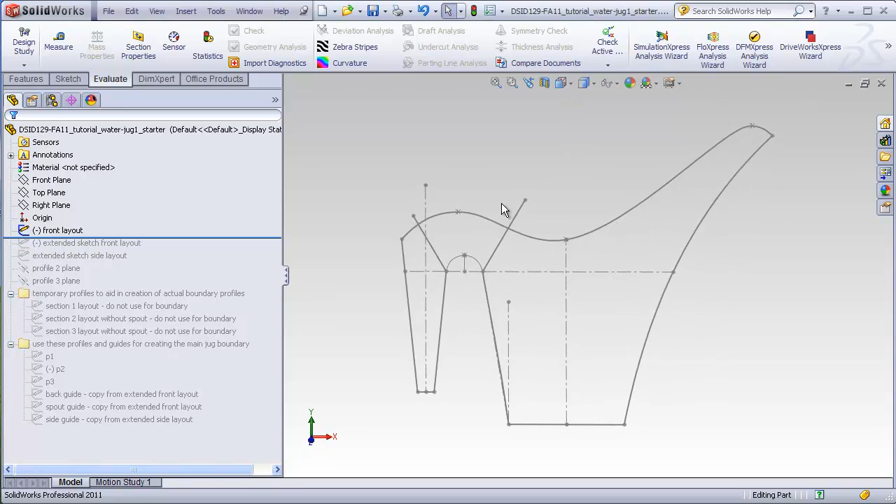That means that we need to have some guide curves that aren't going to end just here or end just here, but are going to have to go all the way up to some sort of plane in this area, and also have some profiles way up here that we can make our boundary up to, even though later on we're going to cut that material away. To do that, I've added a sketch on top of the original layout.

I'll edit this. What this sketch does is copies the original contours from the first layout and extends them as necessary to a common line, which will be defining where a top plane is for a top profile. So this line here is extended with an extra line here, and the extension on this line was short enough that I was able to just drag this line up to the top here. Similarly, I took this line of the handle and stretched it all the way up to this line as well.

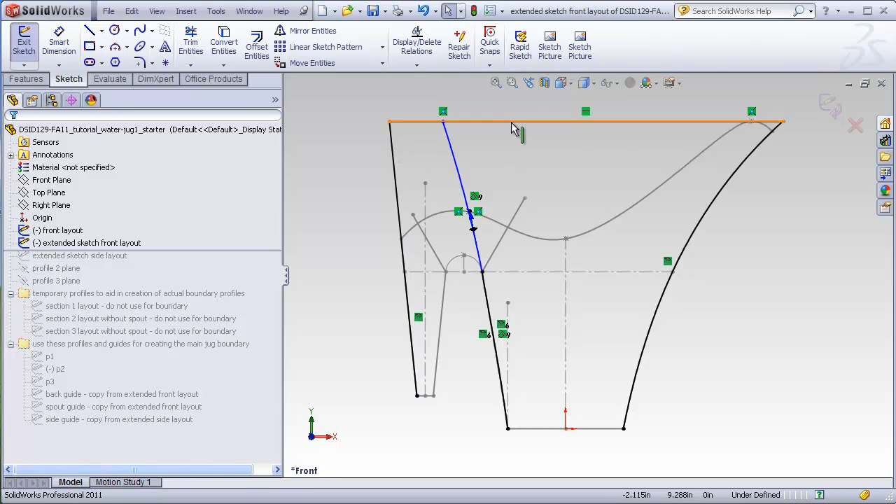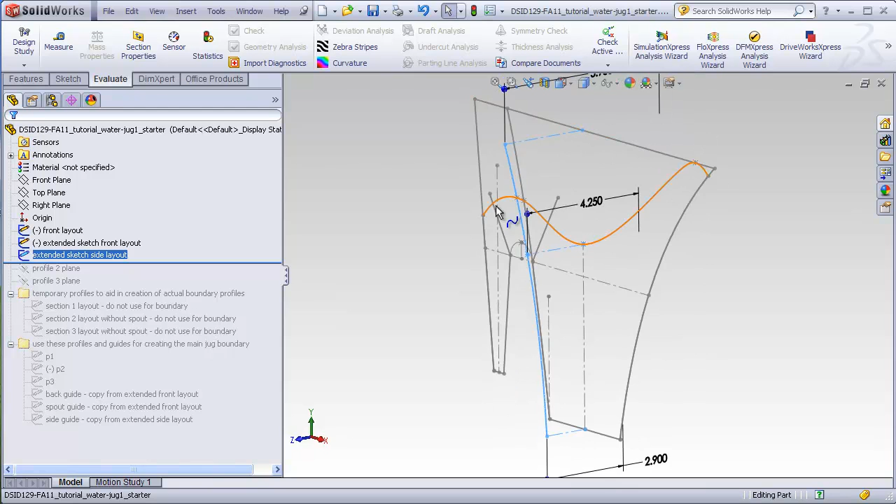On the right plane, for simplicity, I just went ahead and drew a single curve that goes all the way from the base of the water jug up to this top plane here that we have yet to establish. In reality, the jug in this area is going to end right at this point, but we need this curve to continue all the way up to this common top line because our boundary is going to go all the way up to this line before being cut back with this line. This will be a little more clear as we move along.

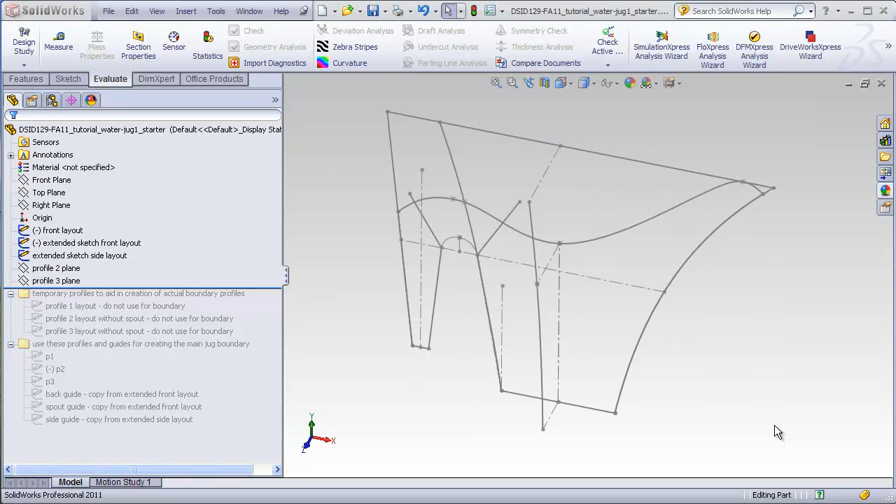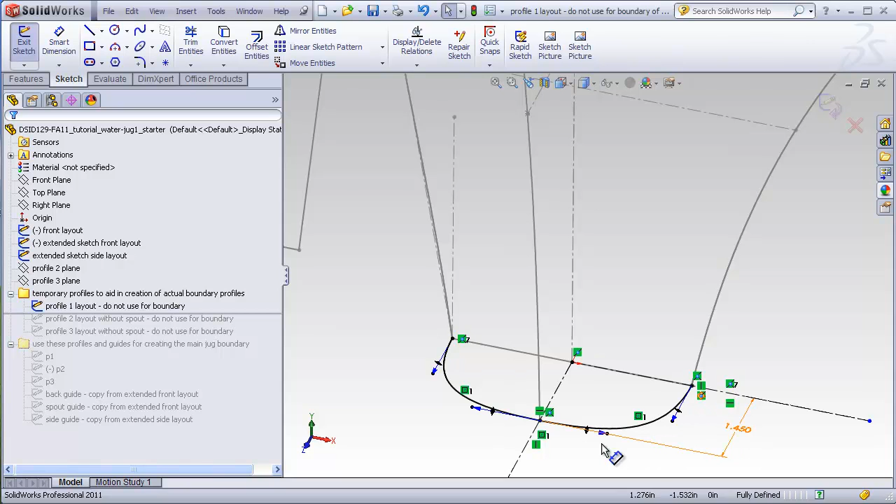So we added a profile plane passing through this line here, and another profile plane passing through this very topmost line that I've been talking about earlier. Now sometimes it's convenient to have temporary profiles that will not actually be used in the boundary. The first temporary profile represents the base of the jug. This was created by making a spline, mirroring it about this line to create this other side. So the base of the jug is symmetrical in all directions.

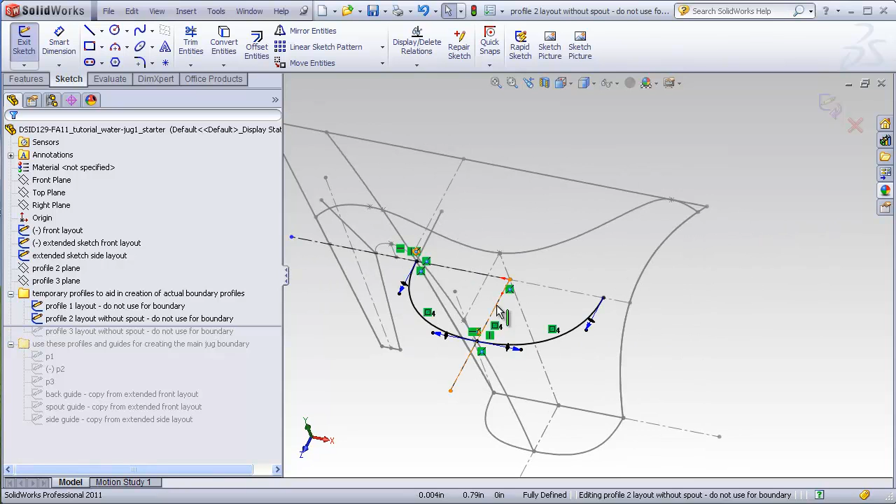The second profile represents what the jug would look like at this cross section if it did not have a spout blended into it. So again, we've drawn a spline going from this point to this point and is mirrored over to this side. The last represents what the jug would look like at this line or cross section, again if it did not have a spout blended into it. This is a spline, pierces this curve here, mirrored about this line here to create this second half here. What we're going to use these for are underlays to help us figure out what the total profile should look like when the spout is added into it.

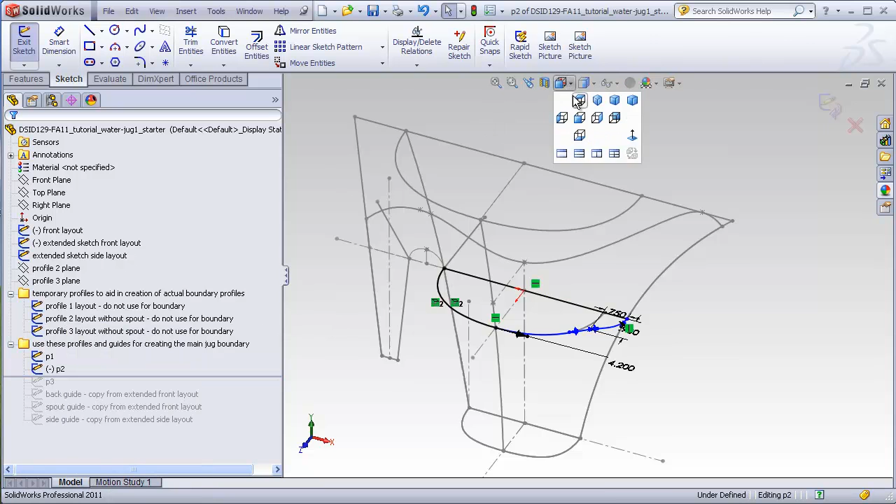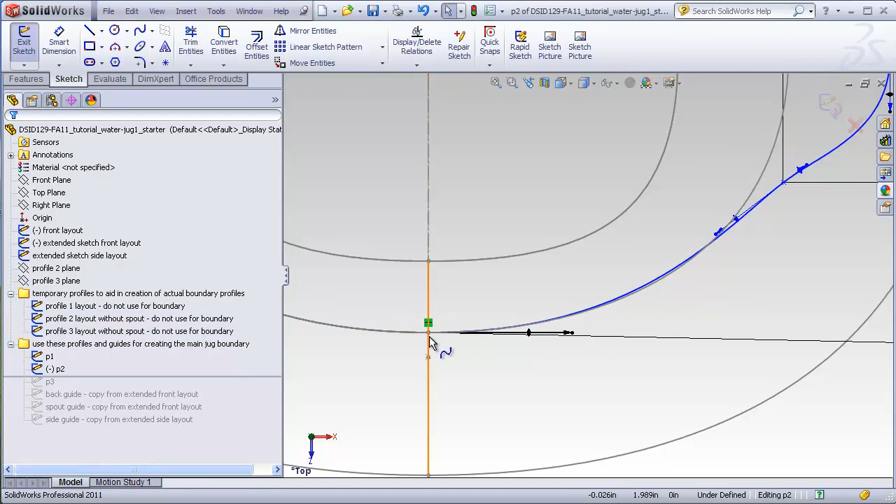First profile that will actually be used in the boundary will be P1. This one is just a simple copy of the profile 1 layout, so we won't look at that anymore. The second one is P2, which is a copy of the Profile 2 layout, which copies this line here, but then has a new line drawn in on this side, which has the spout area blended into it. And we can see the underlay of the original Profile 2 layout sketch, which is being used as sort of a visual guide just to get a sense for how to blend this spline in this area into the spout area. That way this jug will be reasonably symmetrical in this area until it gets to the spout.

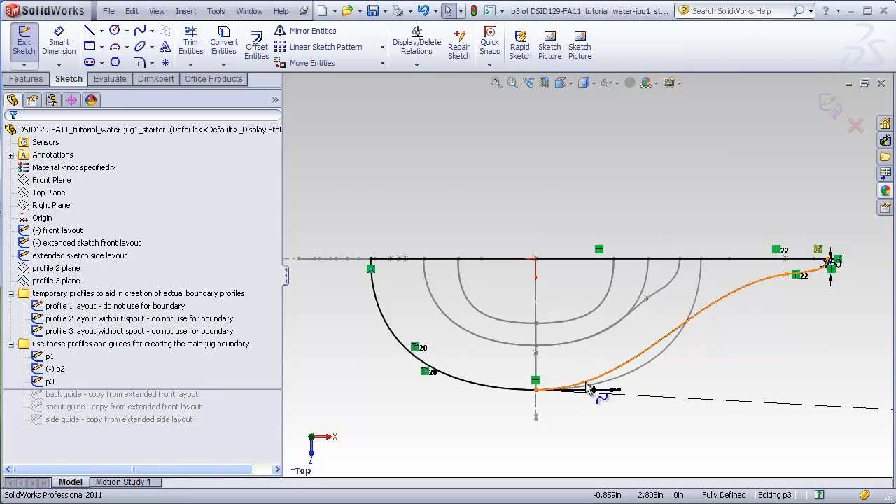Similarly for P3, the same idea is used, where this area here is copied from the Profile 3 sketch. This area here is a spline drawn in to include the spout, and this line here is just being used as an underlay to kind of help us guide what the shape of this should look like.

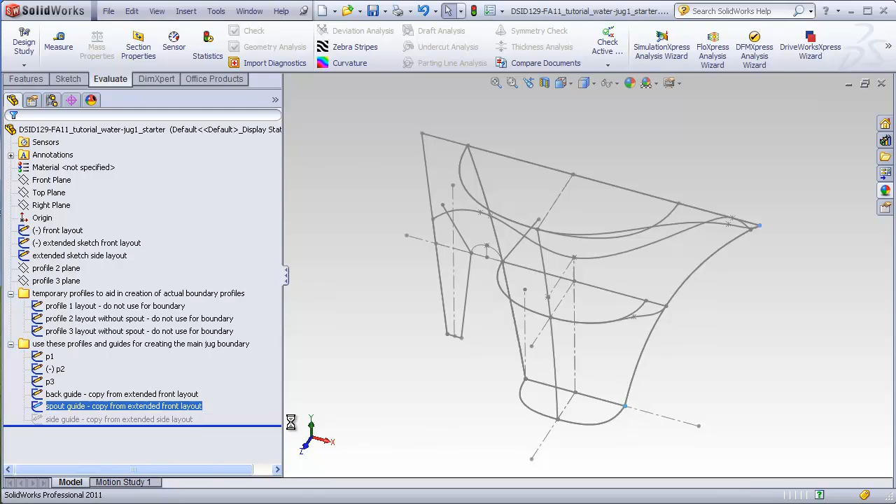Going to have a back guide for a boundary copied from the front layout, a spout guide copied from the front layout, and a side guide copied from the side layout, which is that extended sketch all the way from the bottom to the top. All of these guides go from bottom to top, even though that isn't necessarily how far the eventual jug will be going once it's been completed.

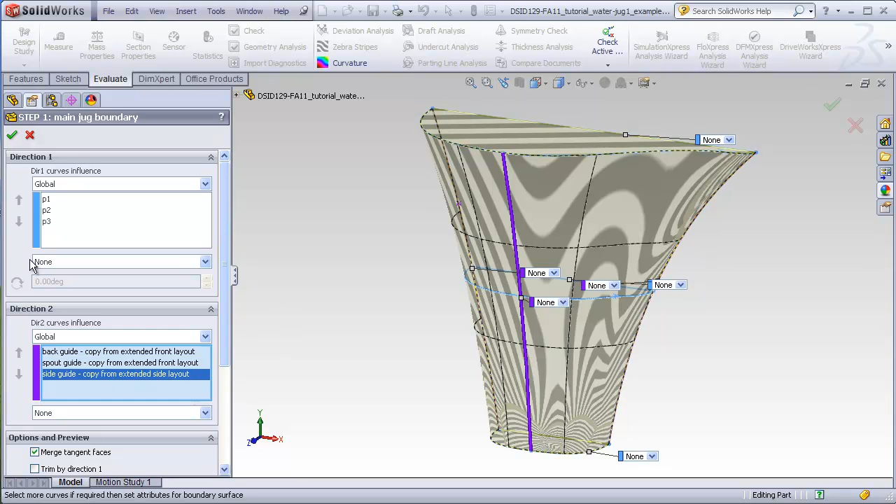Going back to our example file, I'll just roll back to the first step, which is nothing more than a boundary, which is including in direction 1 P1, P2, and P3, and in direction 2 the guide curves I was talking about before, the back guide, spout guide, and the side guide. No controls are being put on any of these.

The handle, step 2, is a simple revolve. So I've copied these lines from the front layout, and this is being revolved about this line.

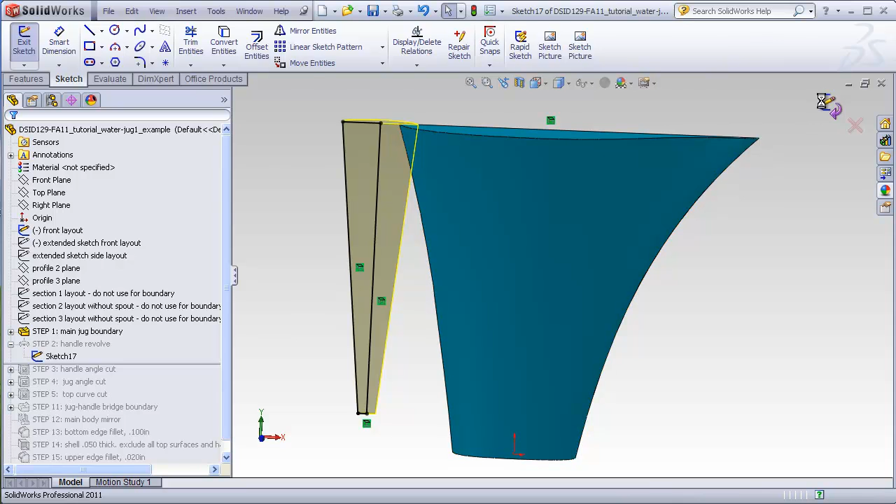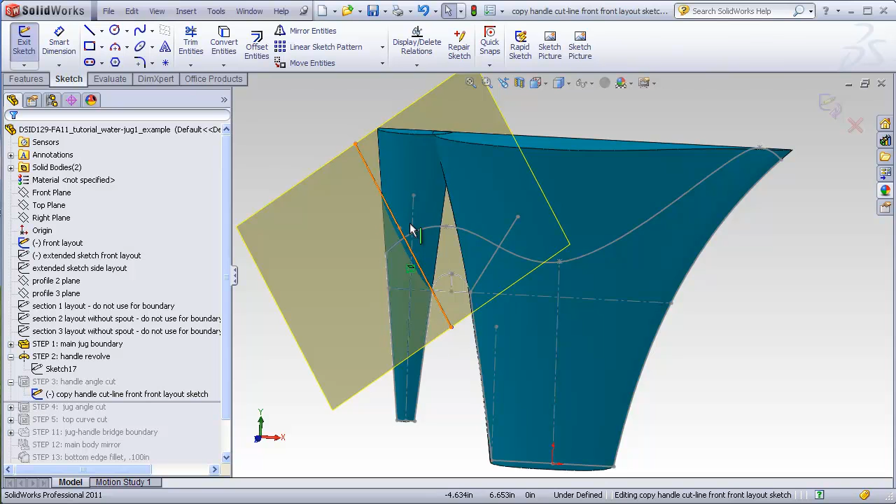The next step is to cut away some excess material on both the handle and later on the jug. This line is copied from the front layout, which we can see here, and then extended a little bit just by dragging the endpoints to guarantee that this line is going to cut completely through this revolved handle. And this cut has to go to this side to get rid of this portion of the handle.

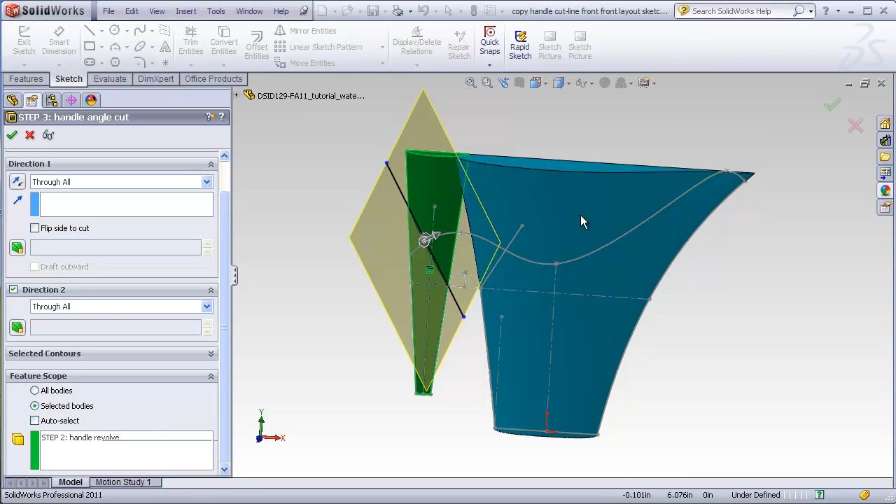When doing this, make sure that the only body that's being cut is the handle body. So under the feature scope, for the handle cut, choose selected bodies instead of all bodies, which is the normal default, and then click on the handle, which is to be cut. If we don't do that, what will happen is both the handle and the jug will be cut at the same time. Let me back up for just one moment.

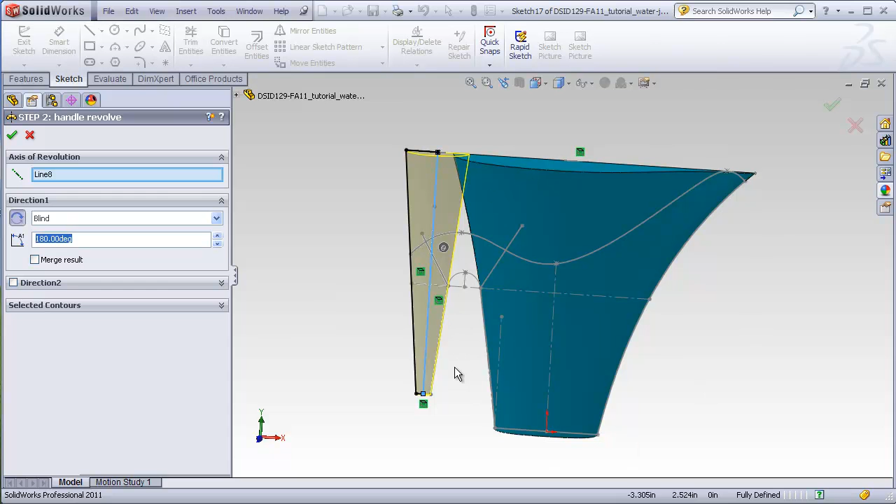When the handle itself is created, make sure that merge result is left unchecked also. This way, the handle, when it's created, will be made as a completely separate body from the jug. And you should see in this folder here, it's the solid bodies 2. The one solid body, when I click on it, will be the jug main boundary. The second will be the handle.

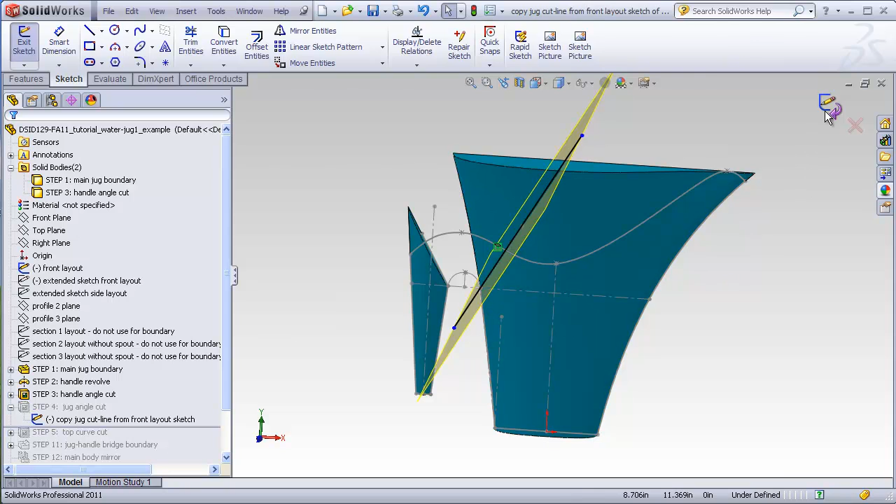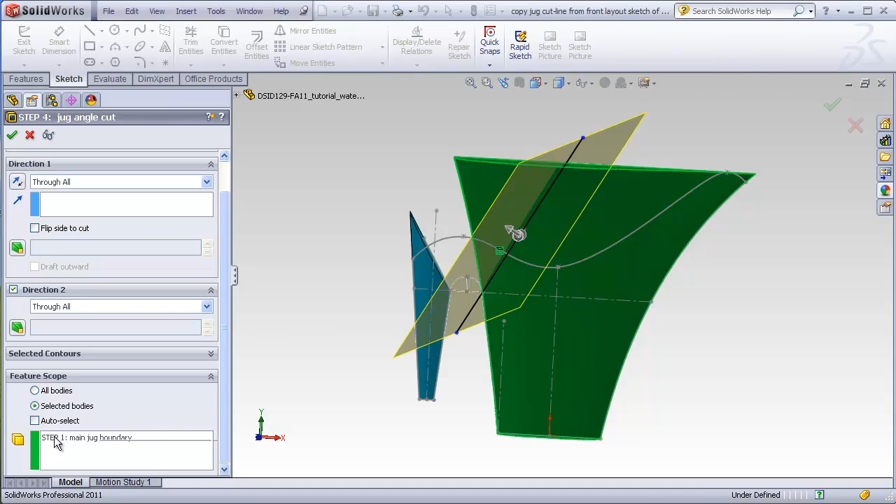Step 4 is going to be to copy this line from the front layout, stretch it out a little bit, and then use that to cut away this excess material from the jug area. Here we see that line copied from the front layout and the resulting cut. Make sure we cut to this side, not to this side, and also down at the bottom of the property manager for the cut, make sure that selected bodies is checked instead of all bodies, and make sure that the only thing that is selected is the boundary for the jug. Otherwise, this handle will be cut at the same time.

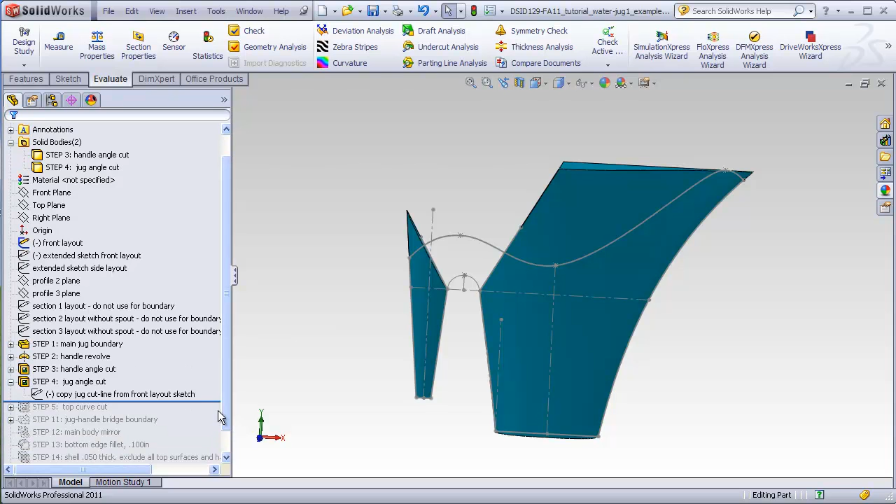The next step now is to copy this line from the front layout and use it to trim off both this top area of the handle and this top area of the jug. Here's the copied line. It's a good idea to grab the end points of the spline and drag them out just a little bit to absolutely guarantee that they are beyond this boundary that was originally created. Do the same at this end too. Otherwise, there's a possibility that this cut might fail. Again, make sure we are cutting upward.

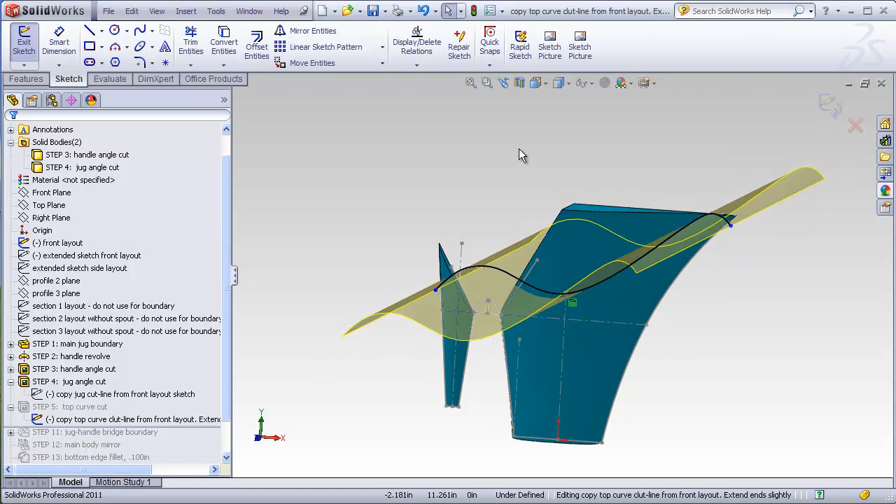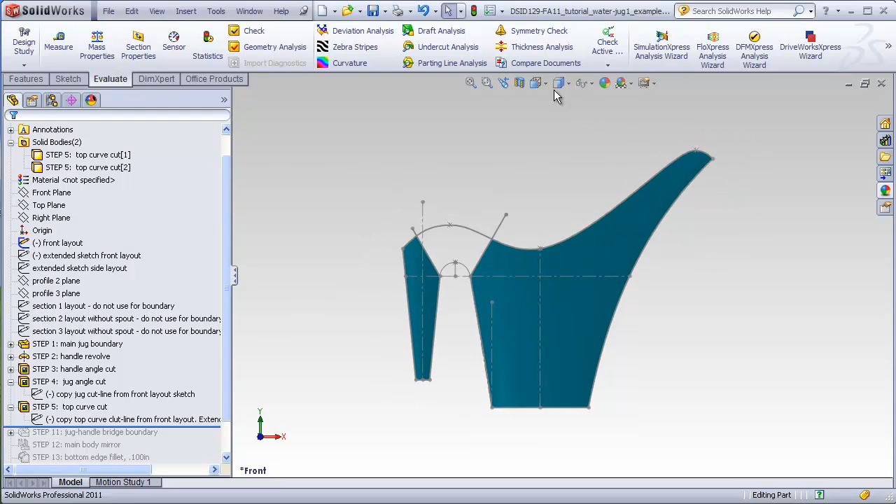And in this case, the feature scope down at the bottom should just be left on the default for all bodies, which means that this cut will cut both the handle and the jug. It's interesting to note that once we've made this cut, we finally can see what the shape of our jug is going to be from the top view. This shape is a combination of the shape of the original boundary with this cut passing through it. And we don't know for sure what exactly that's going to look like until we've completed this cut operation.

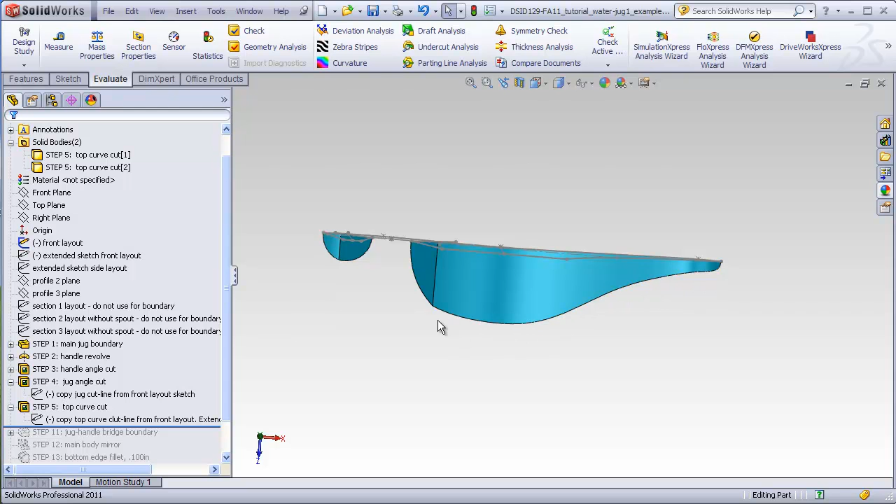So if we aren't too happy with the shape of this when we are all done, we might have to use a trial and error method of going back and tweaking on the profile sketches to get them to look just the way we want so that the finished result gives us the sort of graceful shape that we desire. In a later video, we'll see a way to get a more predictable result.

The next step is to build this bridge that's going to go between the handle and the jug. This is one of the more difficult operations. Rolling this forward, we see the bridge between the two.

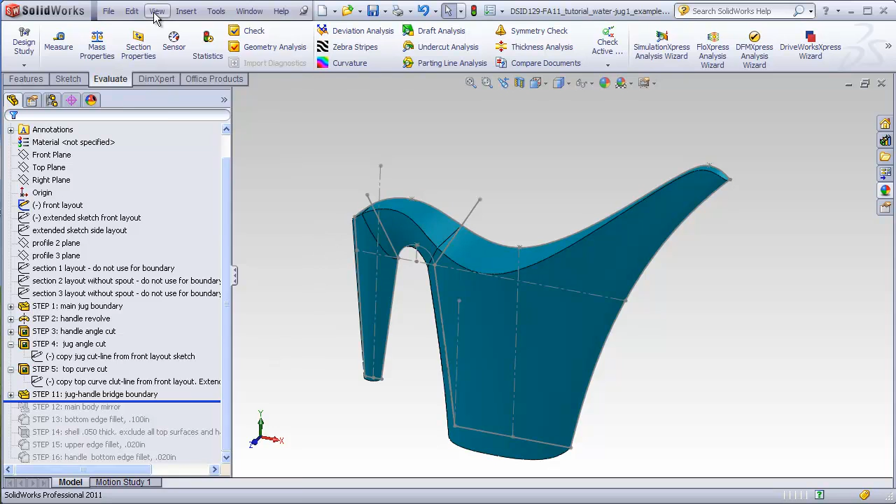Our goal is to try to blend this bridge into this body and this body seamlessly. And when I say seamlessly, I mean so that there is no pinch or peak along this joining edge, or rather edges.

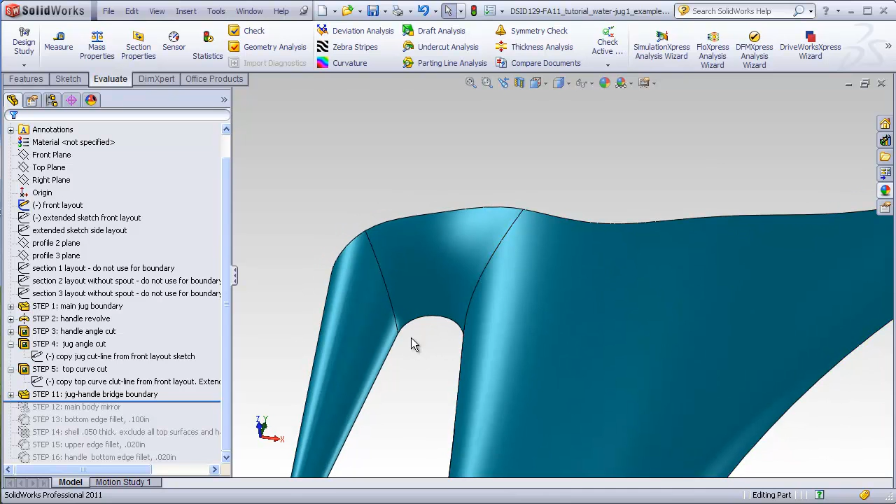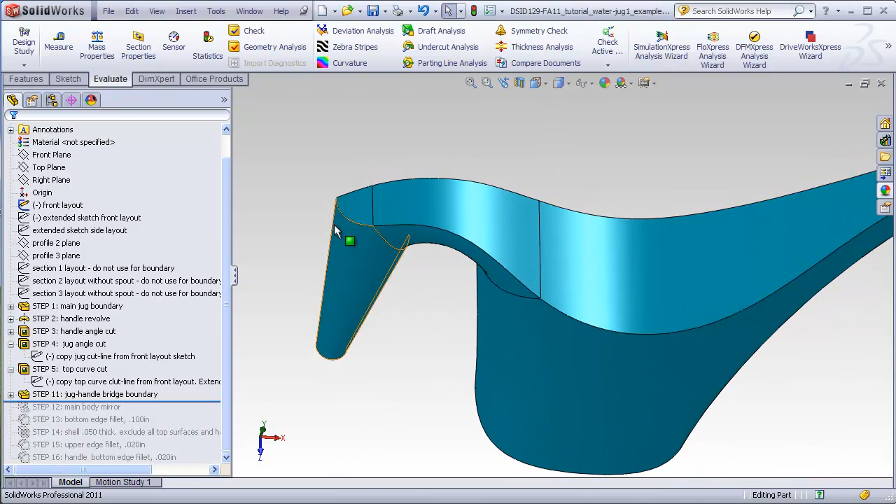To do this, we're going to have to create a guide curve for the bottom edge that we're going to copy from the front layout, the guide curve along the front plane here that we will also copy from the front layout. Then we have an outer curve here which has to be made from two sketches that are projected together. And those two sketches, once they're projected together, should be blending smoothly into this upper edge here and this upper edge here.

The first guide curve we create will just be a copy of this one from the front layout, using convert entities, and that's all we have to do. The next one will be a copy of this curve from the front layout, but we need to trim it back to this point and this point. Again, in its own sketch on the front plane, copying this line.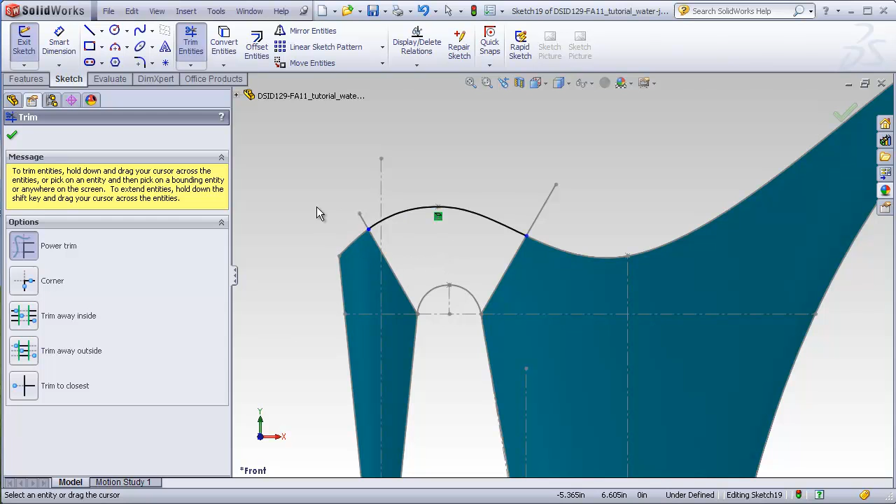And probably the easiest thing to do is maybe copy this line and this line as well using convert entities. Simply trim these excess pieces of line away. This will leave these endpoints blue, and we can just make a coincident relation between the endpoints in this point here, in this endpoint, in this endpoint here. So now we're just using this piece of a much longer line.

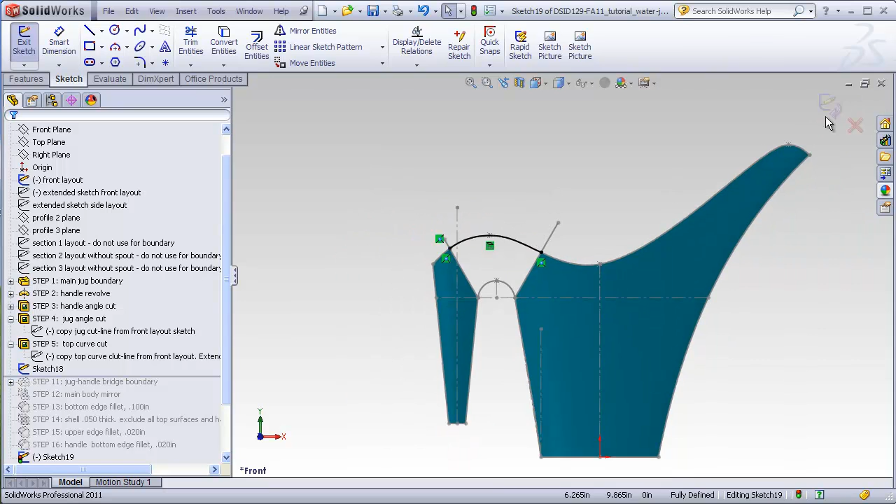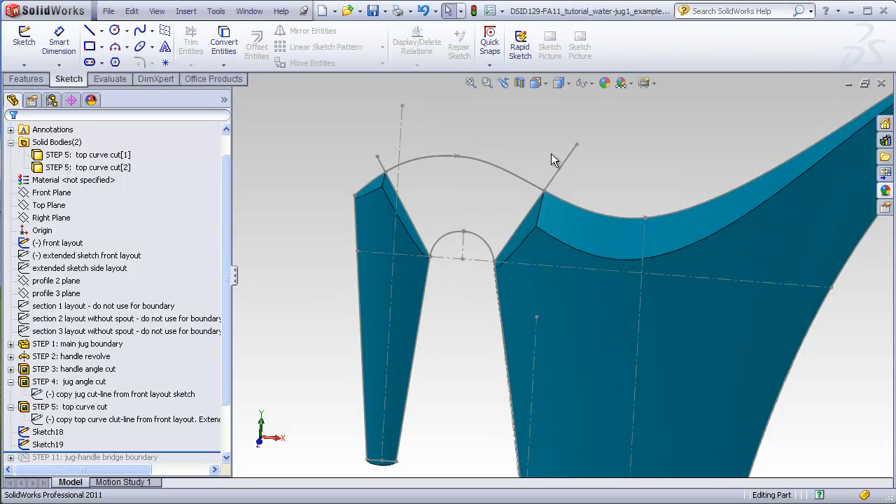The next step then is to create this projected sketch that's going to go in this area. The first curve we need will be, again, a copy of this upper curve. We'll be tempted to think that we need to trim that back to these points like we did before, but we won't need to because the curve that we're going to draw out from the top view is already going to be trimmed back to those points, and the projected sketch will be limited by the shorter of the two sketches. So once again on the front plane, I'll copy this upper curve, and I will not bother even trimming it back.

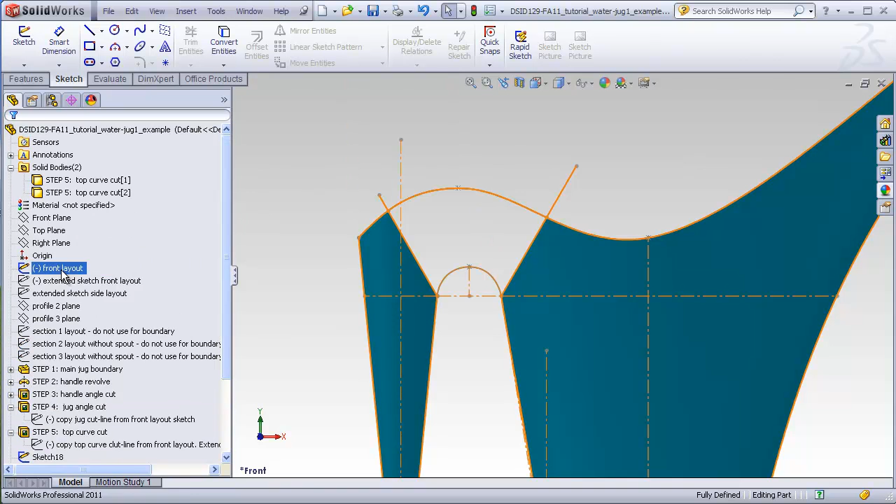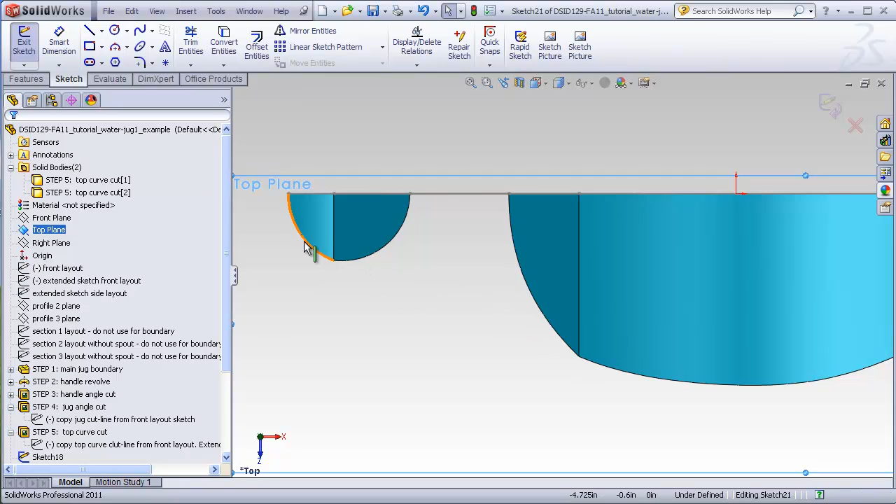Now I'm going to go ahead and hide my front layout because I don't need it for now. And then on my top plane, I'm going to draw a curve that's going to bridge between this edge and that's going to be projected with the curve that I just created a moment ago. What I want to do is make this new curve a spline that's going to be equal curvature to this curve and this curve. I'm going to copy this edge using convert entities and copy this edge using convert entities. Then I'm going to draw a spline between them.

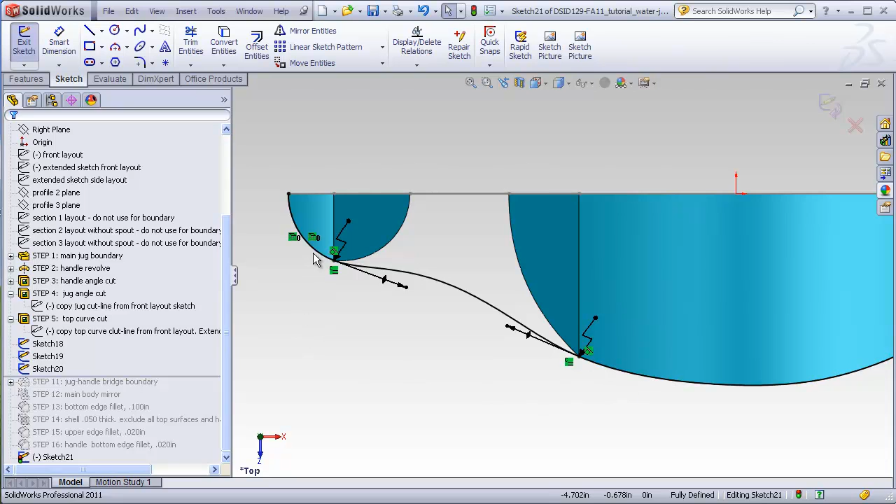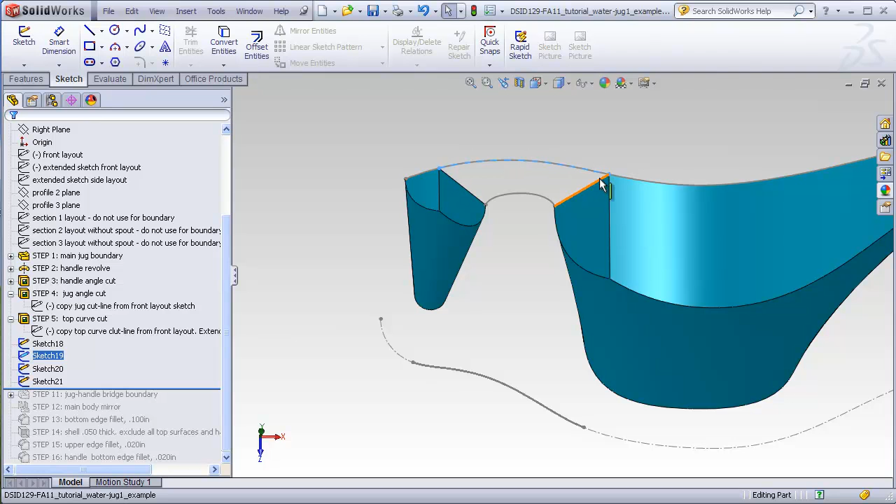Pre-select this curve and this curve, make them equal curvature. Then I'm going to change this curve and this curve to construction lines because I don't want them included in the actual projected curve. So now I have this sketch, which will be used for the bottom. This sketch which will be used for a guide curve on the front plane. This longer sketch, which will be used as a projection with this sketch.

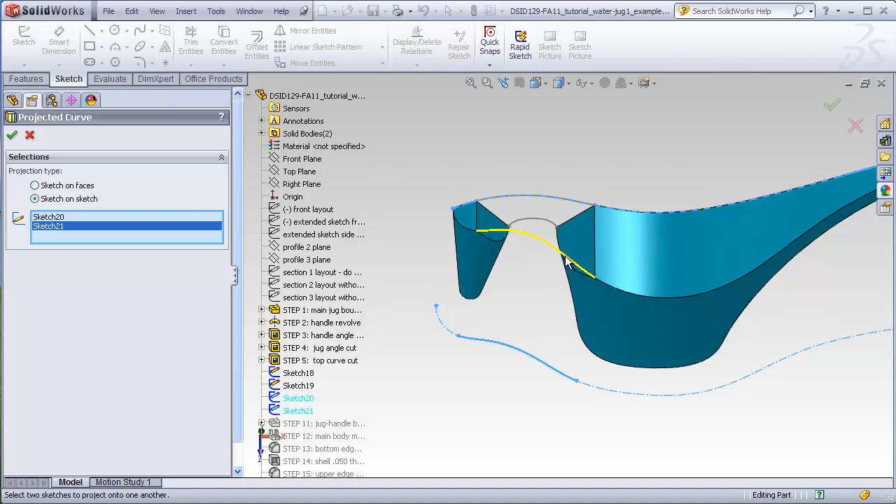So I'm going to say Insert, Curve, Projected. Select sketches 20 and 21 here. It doesn't matter that this sketch goes all the way to the end of the jug. Because this sketch is shorter, it's going to limit what the resulting projected sketch is, as we see here highlighted in yellow. So now I've got bottom guide, top guide on the front plane, outboard guide, which is a projected curve.

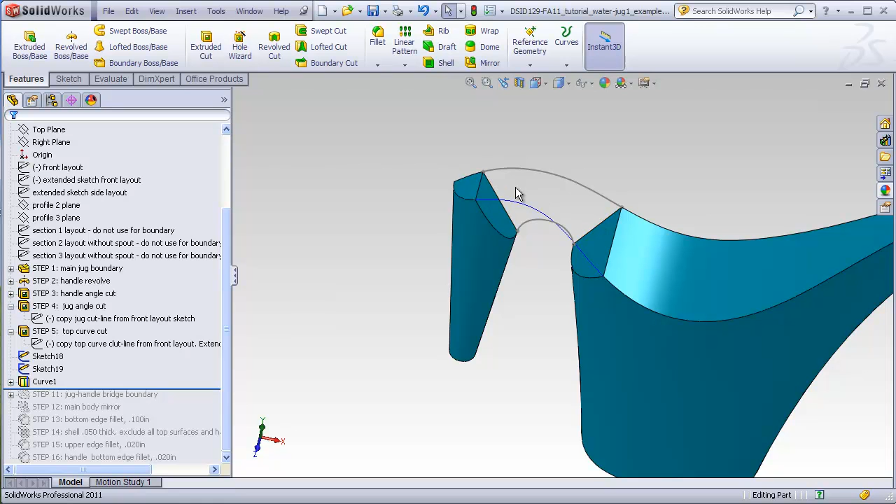Now it's just a matter of making my boundary using everything that I've got. I'm going to make a boundary that goes from this face to this face. In the past we've done some boundaries that have gone between faces that were parallel to each other, but there's no reason for the faces to have to be parallel. For direction 2, our guide curves. Then I'm going to go back up to my faces and change them to curvature to face.

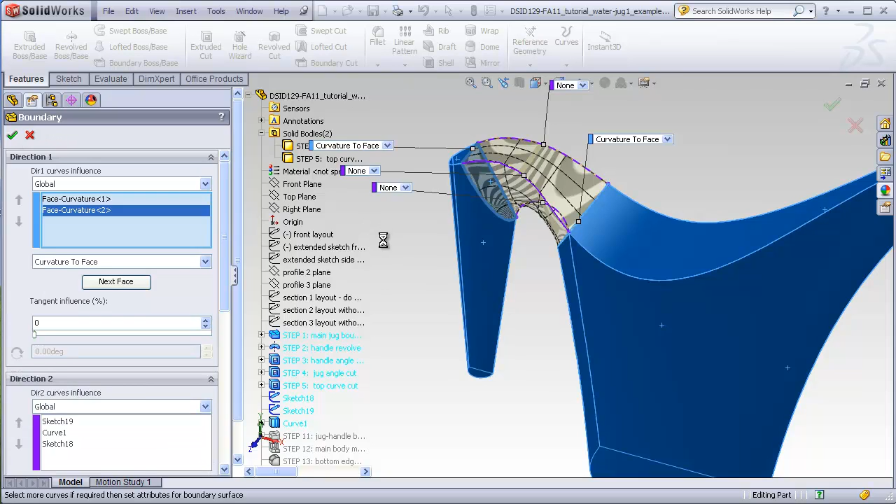Now what I'm going to do is turn on the zebra stripes to analyze the blend between this bridge and the handle and the main jug. So here we see the zebra stripes do connect together. There's no shift between them. But we see that they change their direction pretty severely when they cross the join line.

What this means is that these two surfaces are tangent to each other, meaning that there's no peak or valley between them at the join line, but the radius of curvature of this surface changes dramatically after it crosses this line. So we wouldn't feel a step or anything like that if we moved our finger across it, but our reflections will change very rapidly across this join.

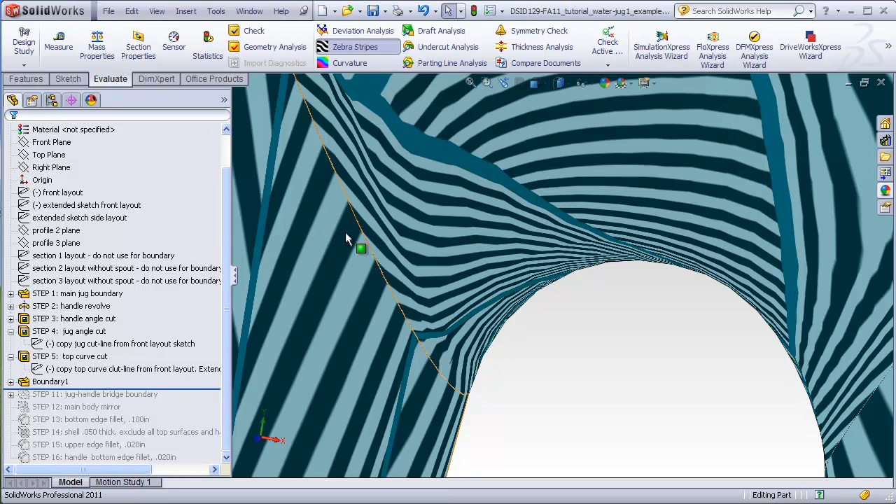Same thing goes here, where the zebra stripes connect up with the handle, but again they change their direction very dramatically the moment they cross over the seam. So this is smoothly blended together, but the radius of curvature of this area is not the same as this area. This is in spite of the fact that we took pains to make sure that the curvature would be the same across these surfaces.

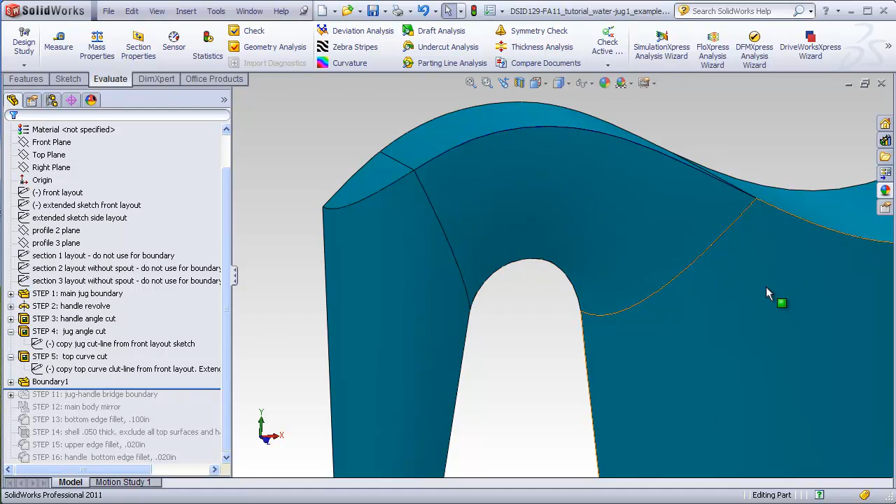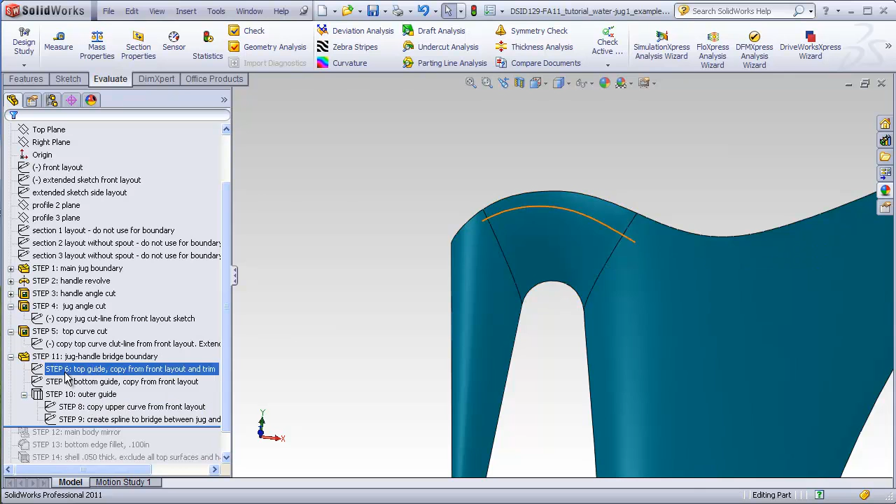Why it's not actually giving us the same curvature, I can't say exactly, but probably because this area is just very radically different from this surrounding surface and this surrounding surface, and Solidworks is just simply having too much trouble meeting all of our conditions. The steps we just completed with reference to the example file were steps 8 and 9, 6 and 7, Step 10, which was projecting 8 and 9 together, and then Step 11, which was taking all these pieces and putting them together to create this boundary.

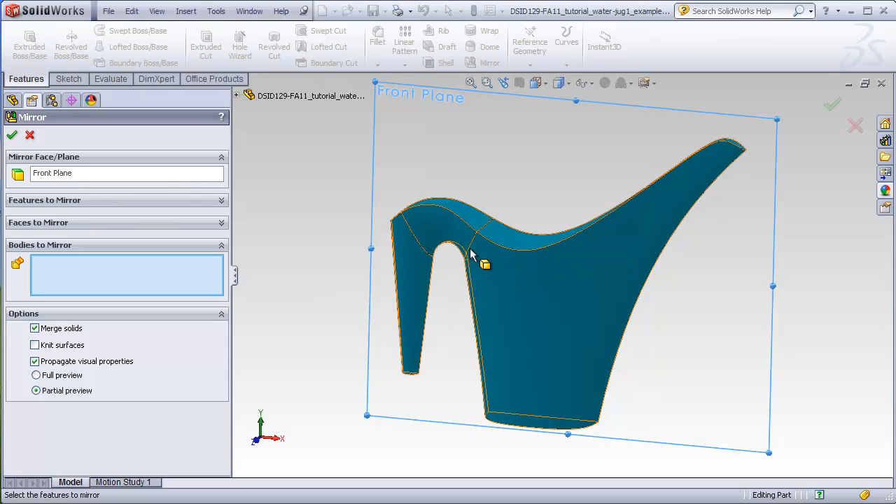The next step is simple enough. We're just mirroring the entire body. Make sure when you mirror this that you mirror the body, not mirror the features, because there's many features in here. If you have to mirror the features, it's very time consuming. When you mirror the body, just select on the front plane, mirror, ignore the features box, go to the bodies to mirror box. Right now we have a one joined up body. Just select that body. That will get us everything at once. That was step 12.

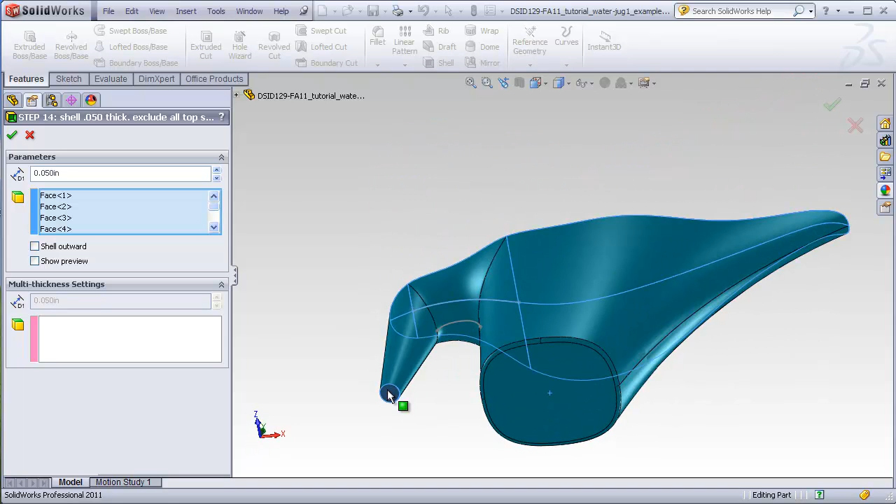Step 13 is just to add a 0.1 inch radius to the base of the jug. Step 14 is to shell everything. We're going to shell at a 0.05 thickness. We're going to select all 6 of these top pieces to be excluded from the shell. We're also going to select this little bottom surface of the handle to be excluded as well. This way, and this is the way the actual jug is built, this handle is open at the bottom so no water will collect in it.

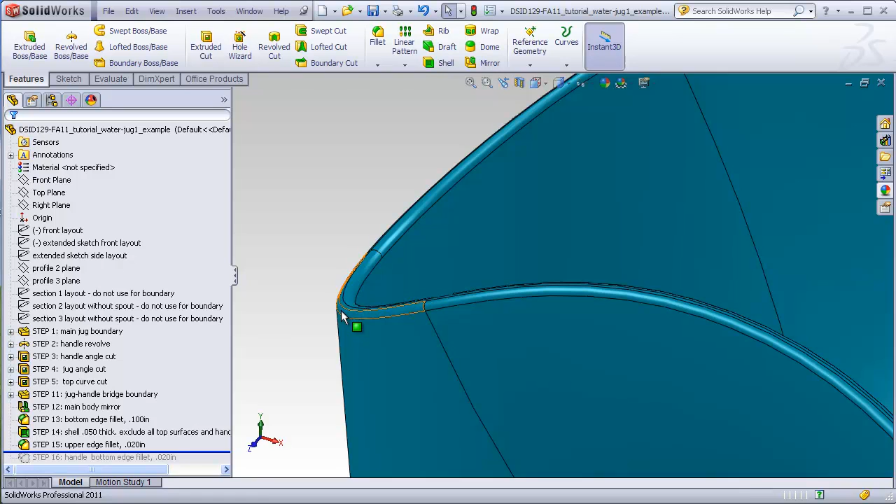The last 2 steps are just to add a .02 fillet to the upper edges so that we don't have any sharp edges on the top, and .02 fillet to the edges at the bottom of the handle.

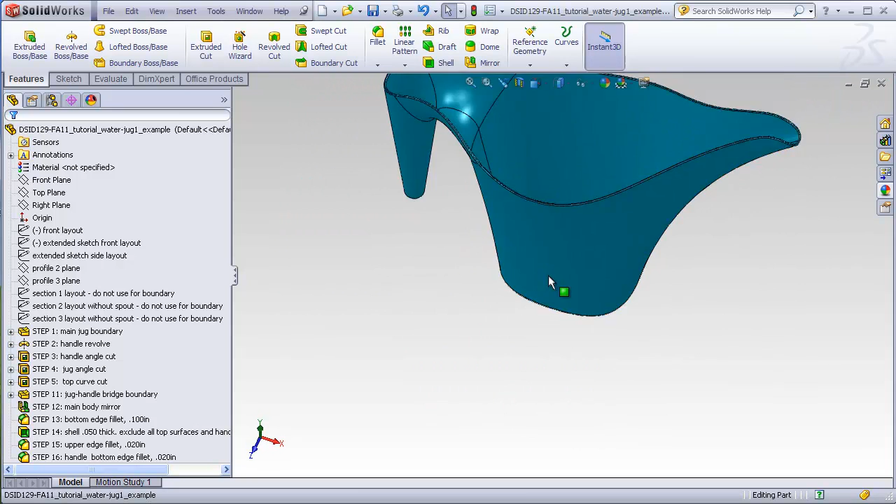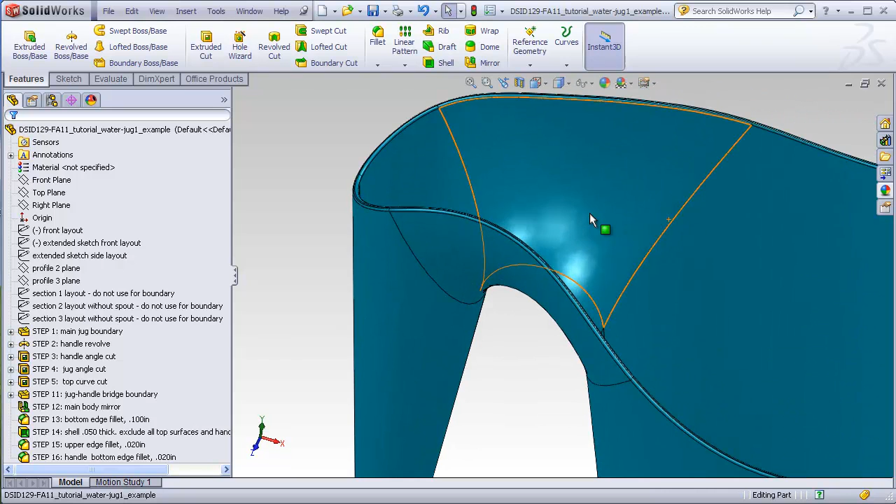So we notice that in some cases you add fillets before making the shell and sometimes after the shell. We add fillets before the shell is completed if we want the fillet to shell inward. So here we see on the inside of the base is a smaller fillet, which was the inset shell, this outer fillet here. Whereas these fillets on the outer edges here and here are very tiny fillets and would not be able to be included in the shell because they are smaller than the shell thickness. So we actually add these after the shell is completed.

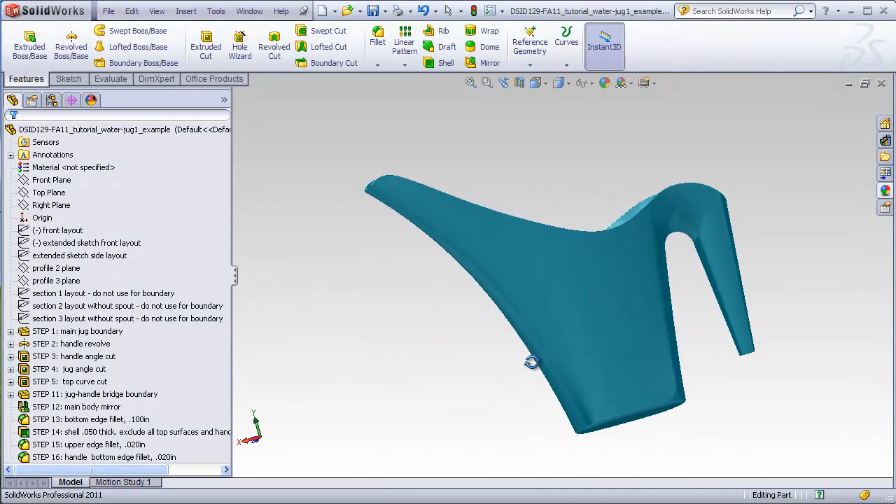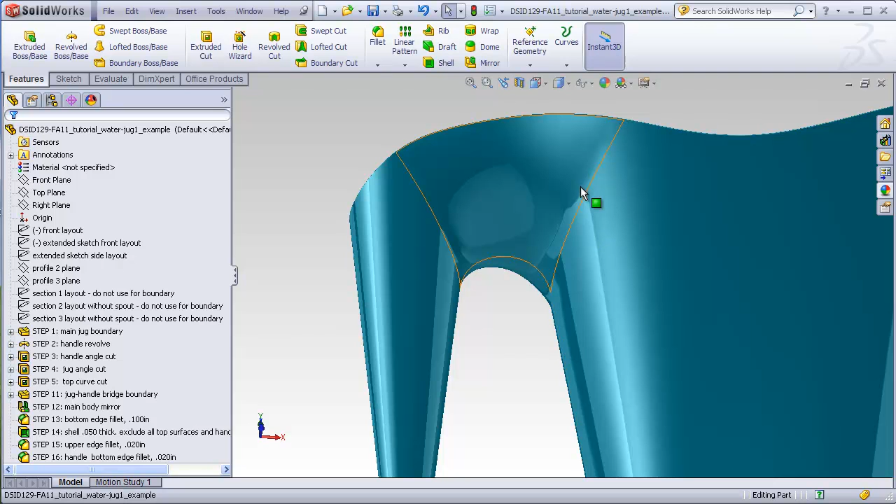So let's take a look at the jug with RealView graphics activated. This is a feature of the graphics cards in some laptops or desktop computers. Most of you probably won't have this, so you won't be able to look at your models this way. This allows us to see reflections on the fly. And what we want to look at is this area here. We can see that the reflections connect up through this area, but they do make this abrupt change in direction. Same as this area here. So we see that the reflection connects together across these lines, but because they change their direction very rapidly, it means that the radius of curvature across the surface is changing very rapidly also.

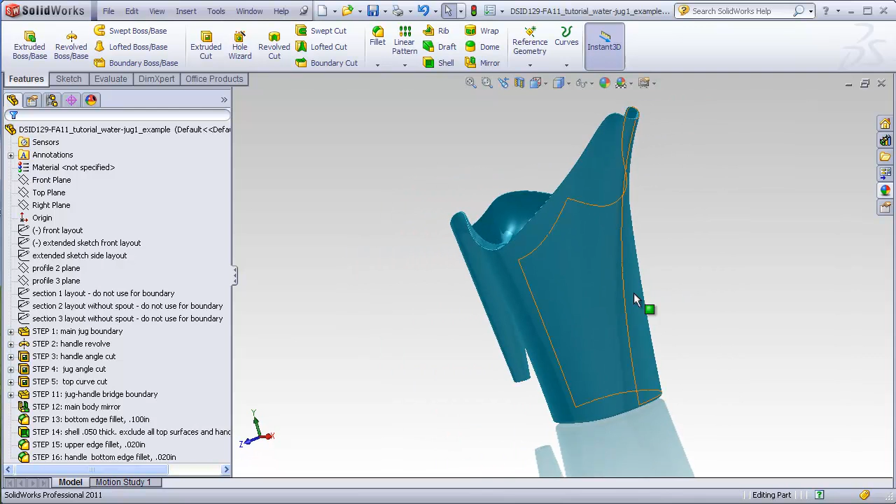Also take a look at the spout area. We didn't take any special pains to make sure that when the spout was mirrored over, that this would blend back into itself properly with the mirror command. If we wanted to, we would have to slice a little section out of the middle and then build a little bridging patch to blend this together better, but that would make this particular tutorial a little bit too complicated.

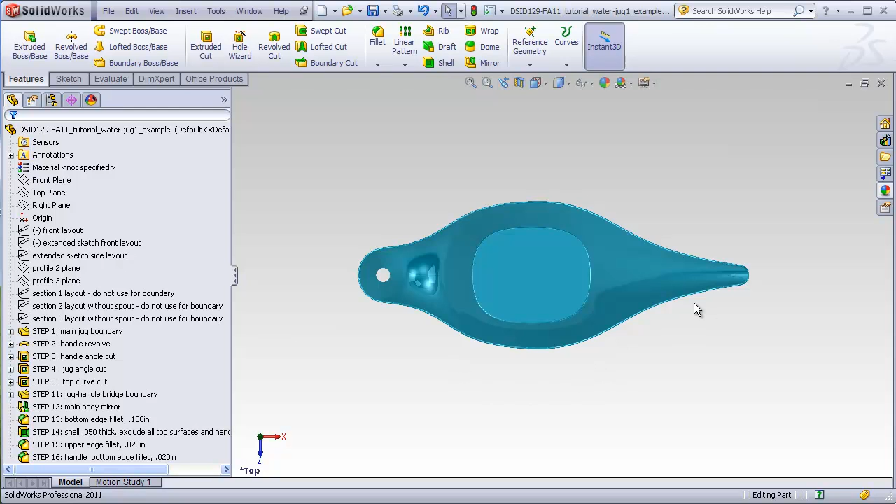Finally, let's see what this looks like from the top view. Now we can see finally at the end of this process exactly what the shape of our jug with handle is going to look like when everything's been completed. Because of the method we used, we didn't know exactly what this was going to be like because we built an overbuilt boundary and then later chopped it away, which resulted in a particular shape that we could not fully predict.